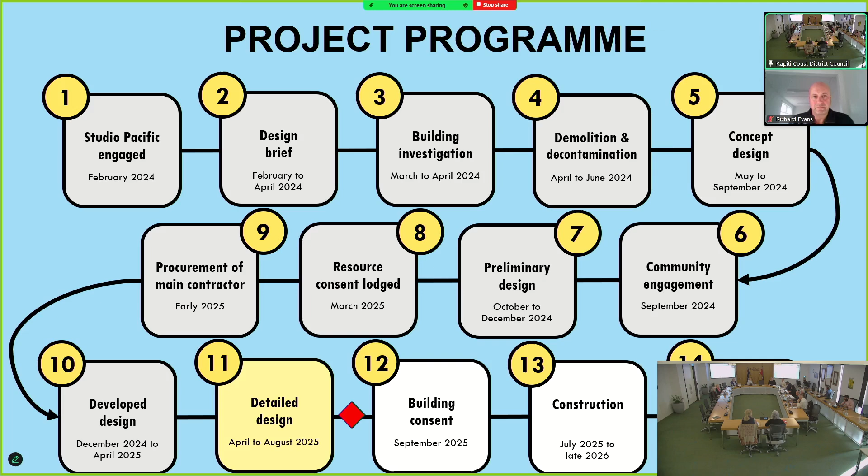For the next slide, Studio Pacific have done another updated fly-through that we can play, and as we play it I'll give a bit of commentary, and we can take questions at the end if that's all right.

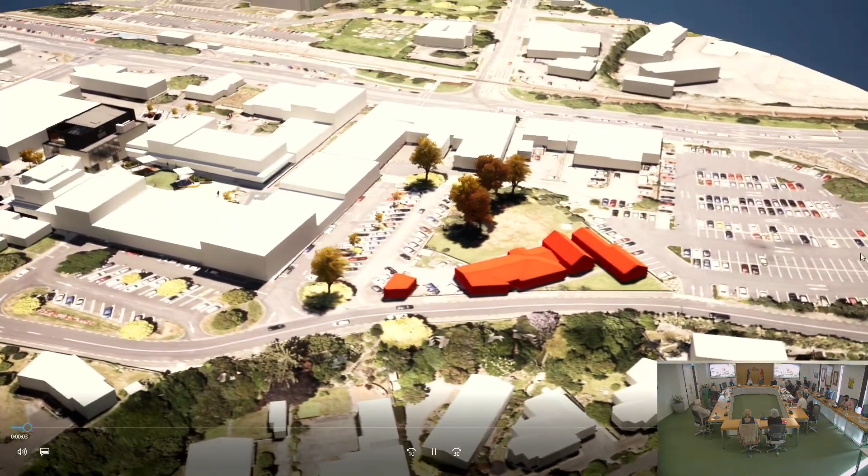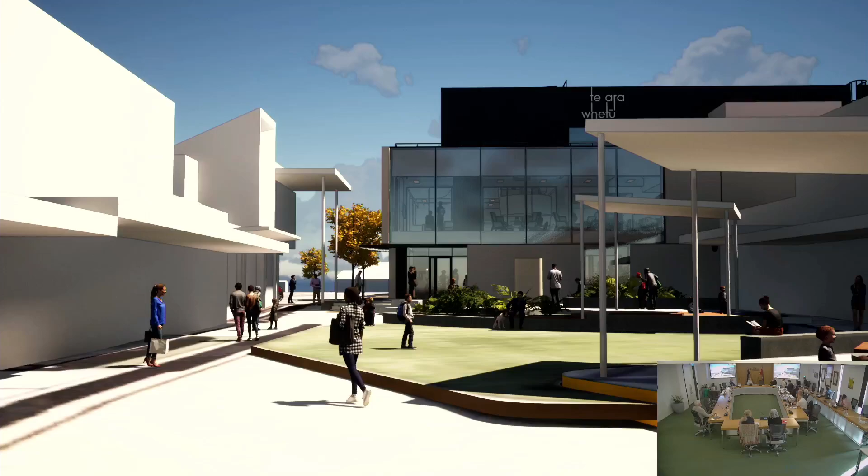This gives everybody an indication of where we are. I think by now people know where Te Ara Whetū is going. So we're coming down through here into Mahara Place and looking up where we've got the large windows above on the first floor - that's the community lounge looking down into Mahara Place.

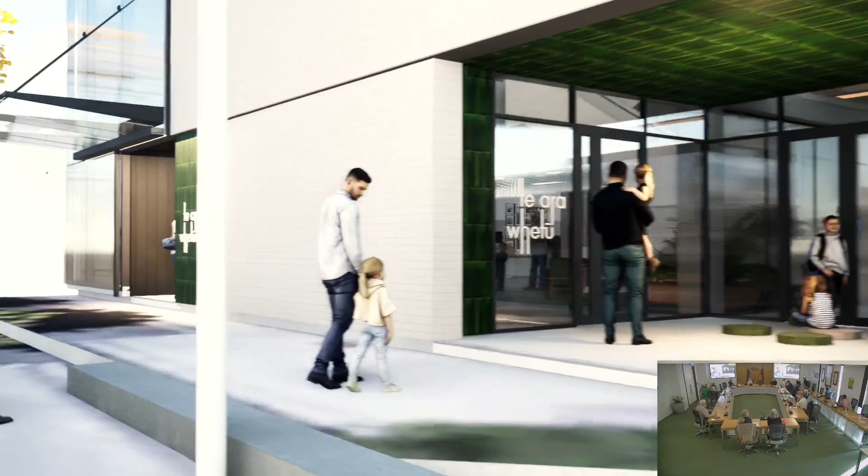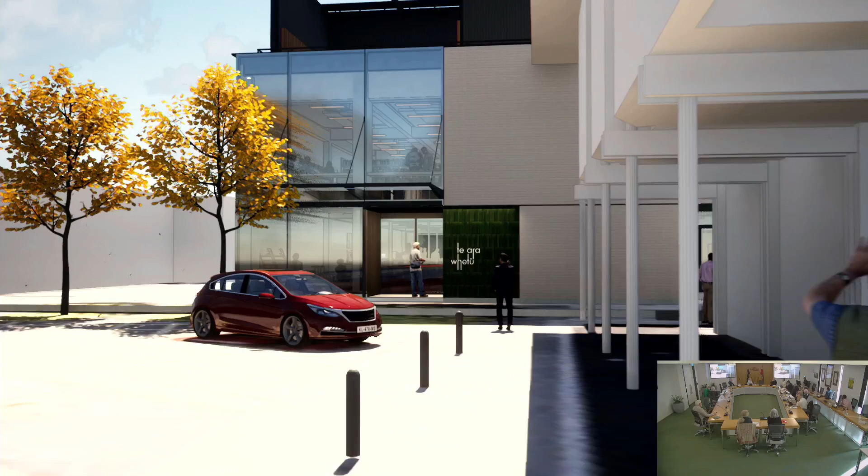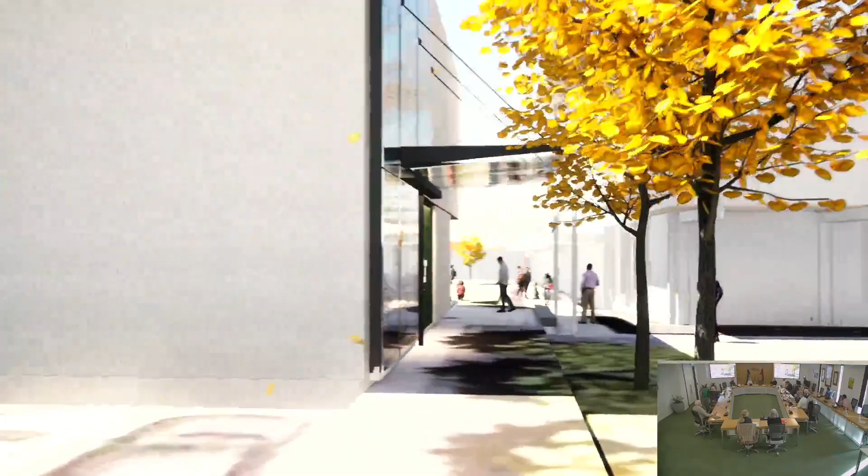Now we're coming towards the new entrance with a green tile entry. The signage isn't confirmed at the moment, so that's just a placeholder for now. The brick is an indication of the colour we're going for on the outside, and there's a bit of work in terms of patterns that might come onto that brick - still a little work in progress.

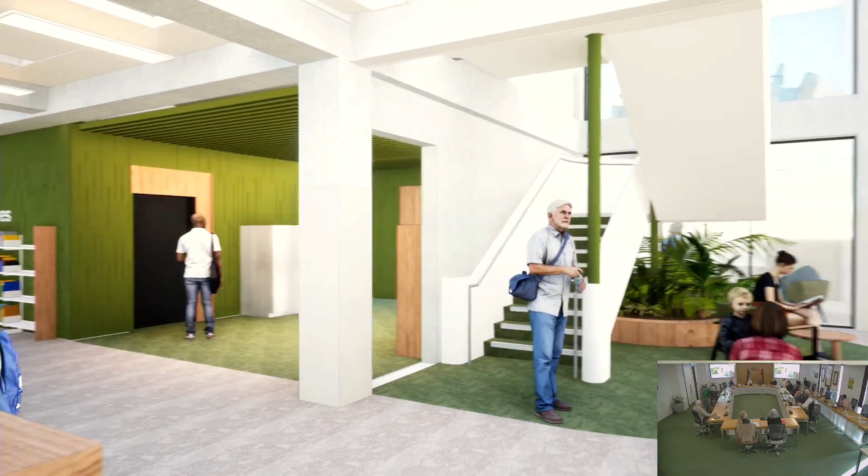Now we're coming into the ground floor where we've got the collections, an open space here where the library team can activate it in multiple ways - quite an exciting area that they're looking forward to using.

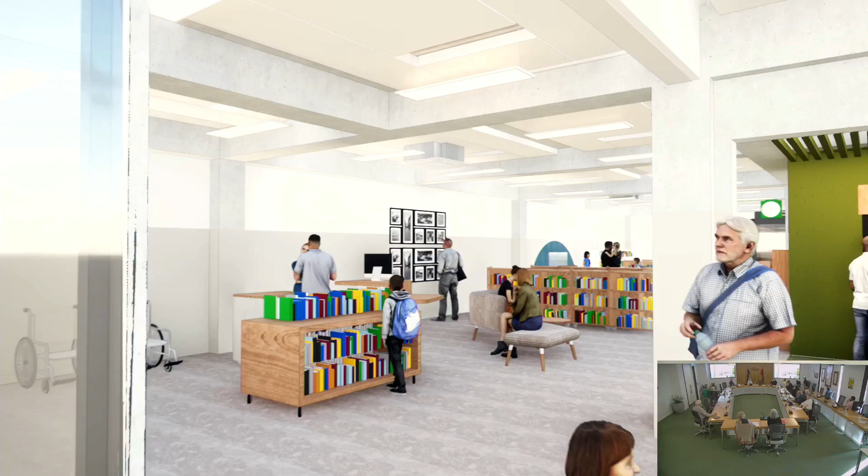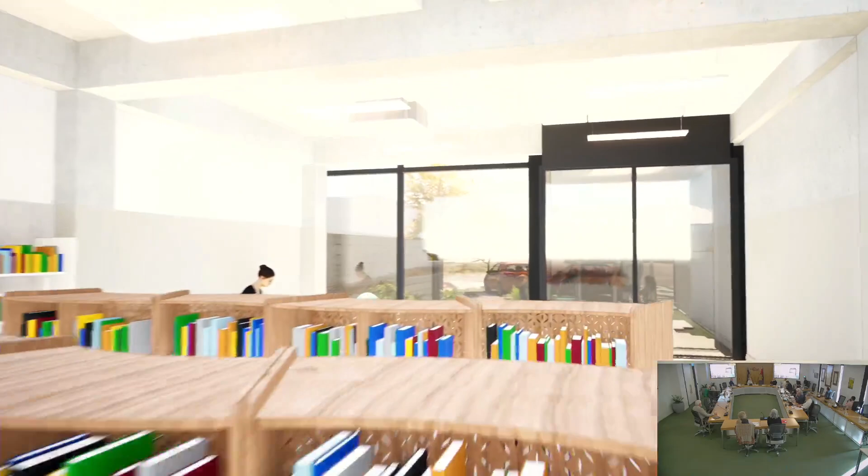Coming back down into where we'll have library staff predominantly in this area, and then down into the children's collection area. This space is where library staff are looking to change the children's area around, having a stage that they can put up and take down as they please, often used for storytelling and the like.

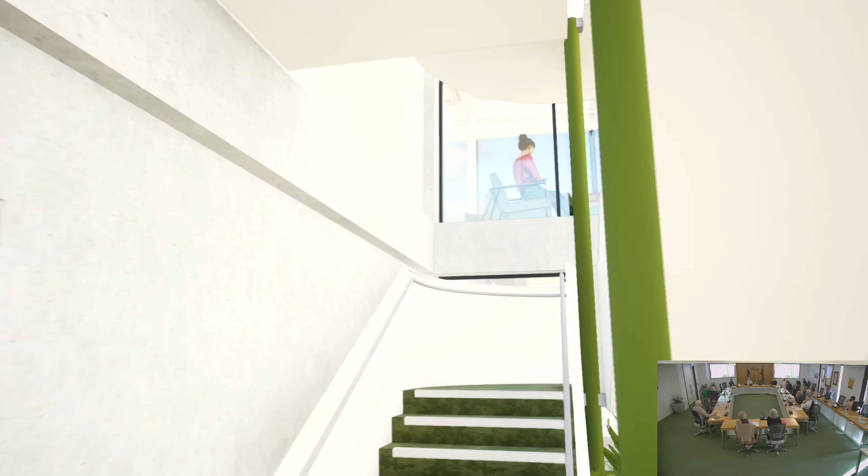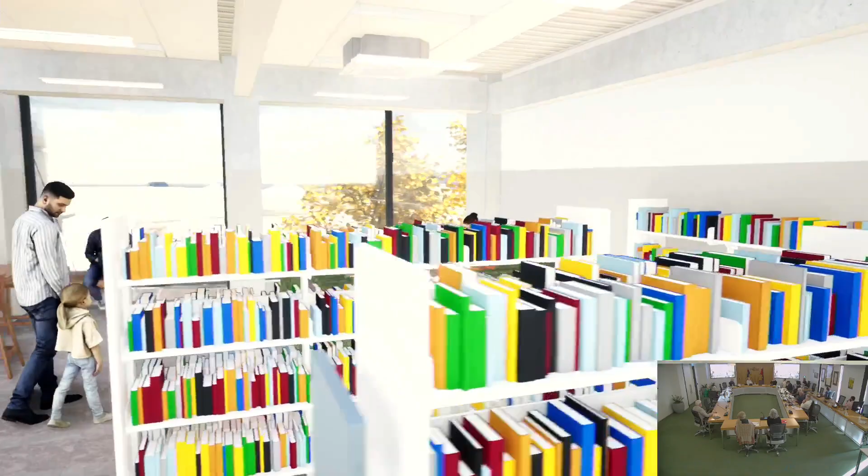The green clock - I'm not sure if anybody noticed that. That's a clock that has been refurbished; it used to be in Mahara Place, and there used to be a clock committee, so we've managed to find a home for it. The green goes really well with the rest of the interior fit out and colour scheme that Studio Pacific are going with. It's quite exciting to see that it's got a home.

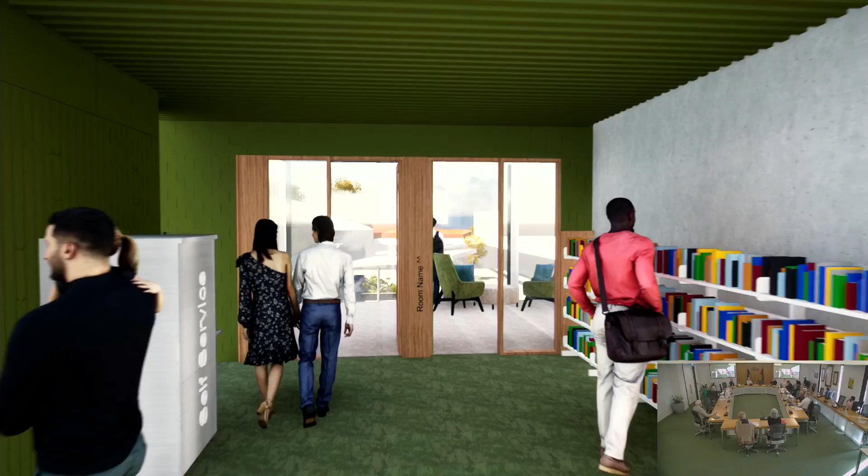Up here on level 1, there's again a Te Ara, the pathway that goes through from east to west. This is a heavy collection area, however all the shelving we're using on this floor, the majority of it, we've managed to recycle from the Paraparaumu Library, where they got rid of a whole lot of shelving, and managed to cut it down to a size that the library team are really excited to use.

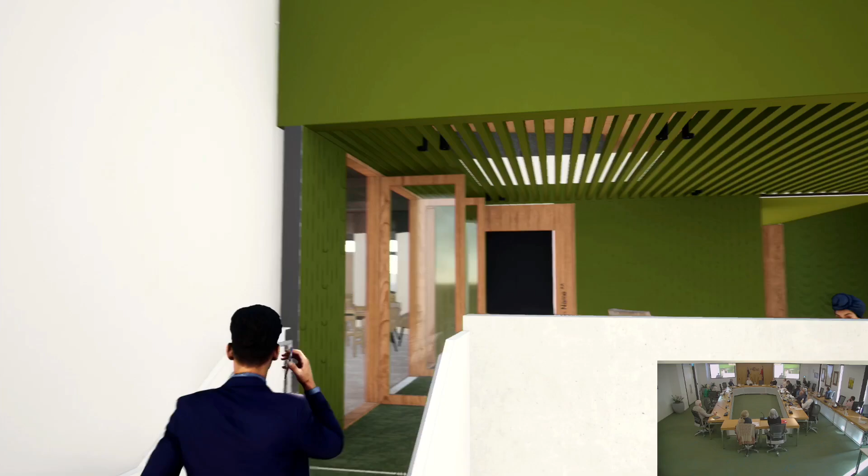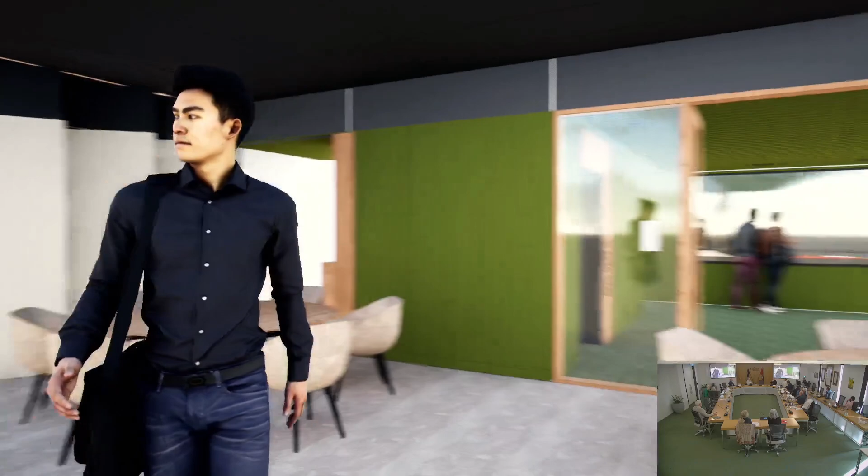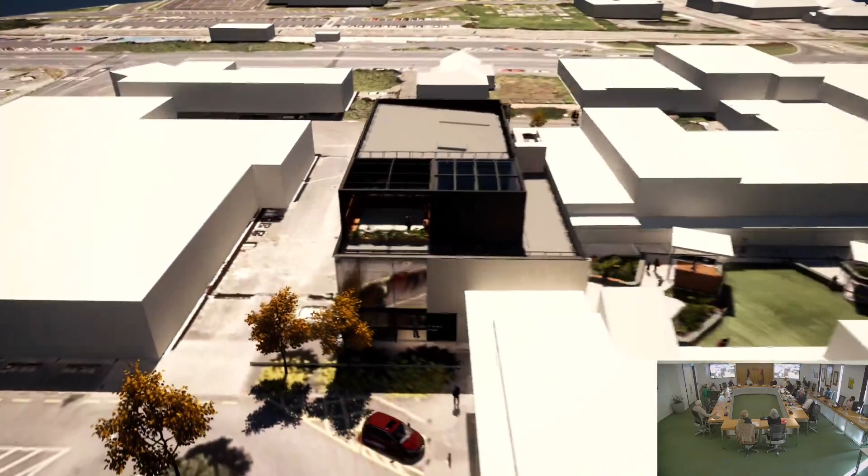Now we're coming up to the top floor, which has less or no collections. This is the multi-use space - you can see there's a dividing wall that can be opened and shut, so you can use the space as two rooms or one, and this comes out onto the outside balcony. That felt very quick actually, trying to talk through it.

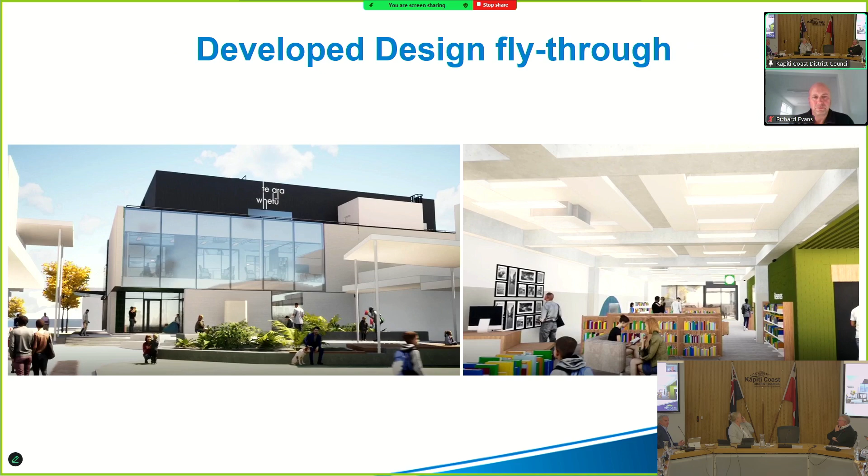At the end of the presentation I've got some floor layouts I can run through, and we can take any specific questions then if that's okay. So we'll go through the floor layouts first, get through the rest of the presentation - that might preempt some of the questions. Right, yep, sounds good. So, the next slide.

So the design collaboration - continuing to work with Studio Pacific and the other sub-consultants. We've also been holding workshops with the wider council teams, the likes of the libraries team, property, customer communities, and IT as well, just making sure that we sense check the design and that the outcome's going to be practical and work.

Naylor Love have also provided some early input in key trades to ensure their accuracy around these estimates. Some of those key trades are like the facade, and some structure as well - structural engineers coming in who are going to fit out the new steel beams and the likes. And then mechanical trade is another area that we've reached out and tried to get some input in nice and early before we go to market for fixed pricing.

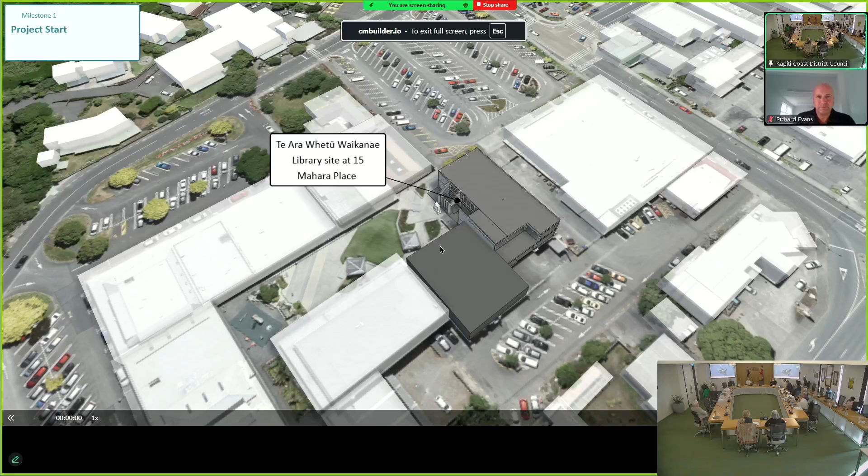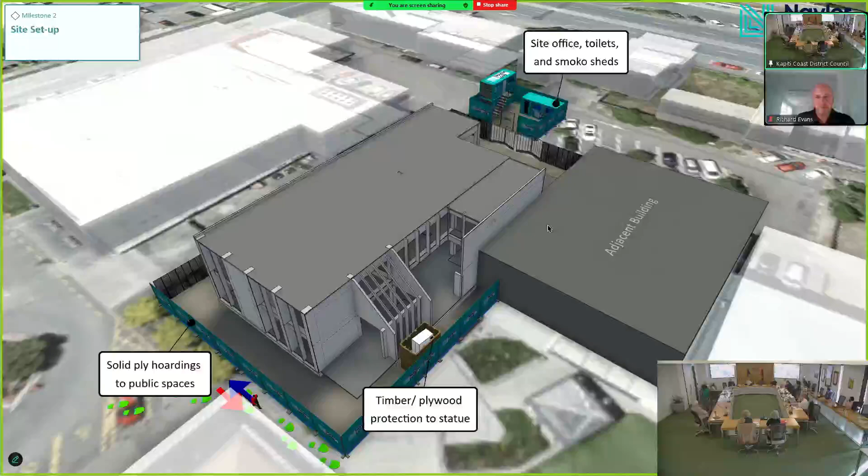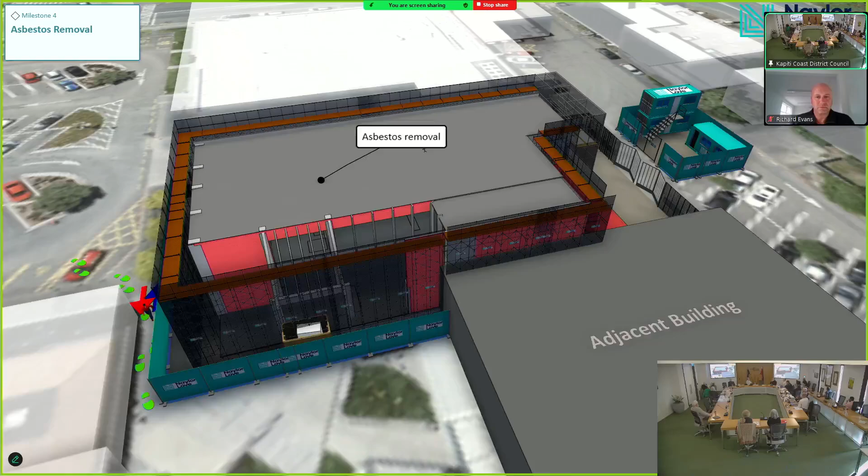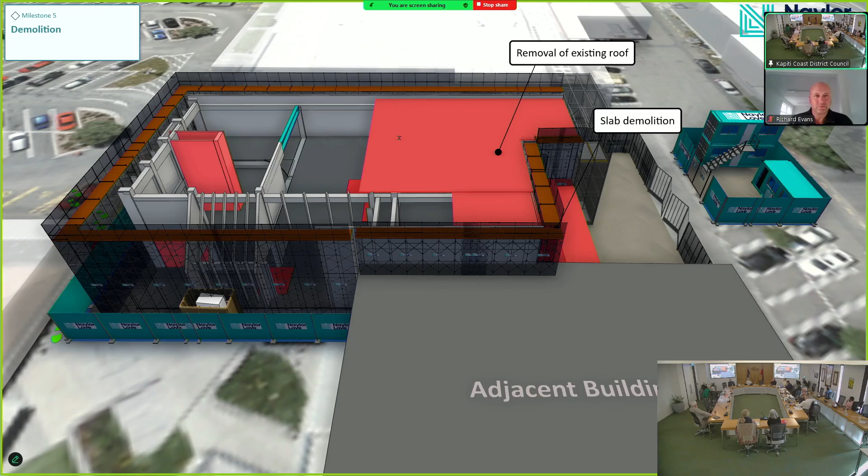So BIM is a building information model - in essence, building the new project in a computer model before we even start on site. This is really a great tool in terms of being able to have a look at construction methodology, but then when you start to get the subcontractors these days, especially the service subcontractors, incorporating it into their model into the construction model, you start to find clashes. That's where traditionally you'll get delays and variations. So being able to have a main contractor that can manage this is really important for the project for mitigating risk.

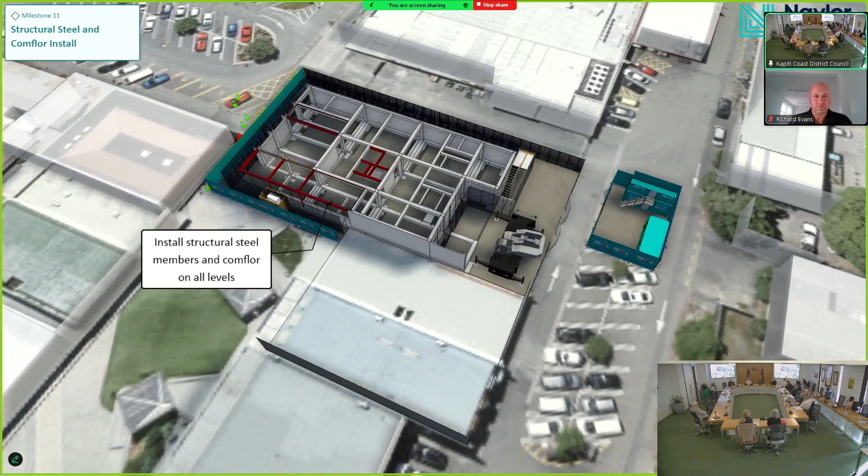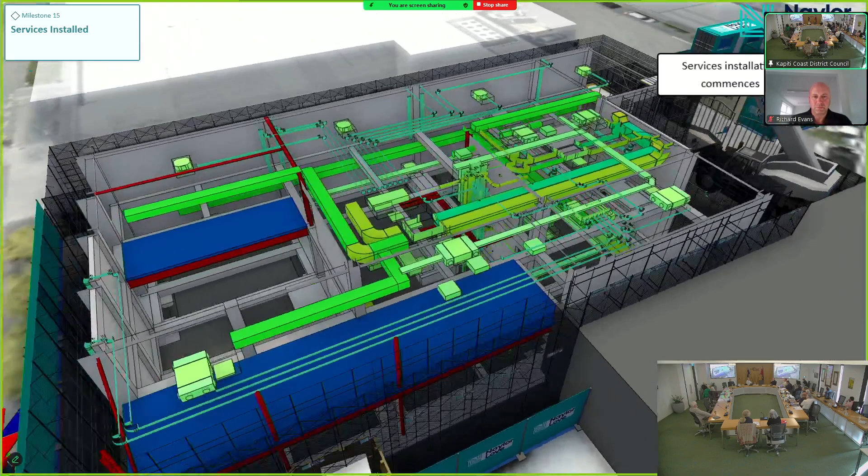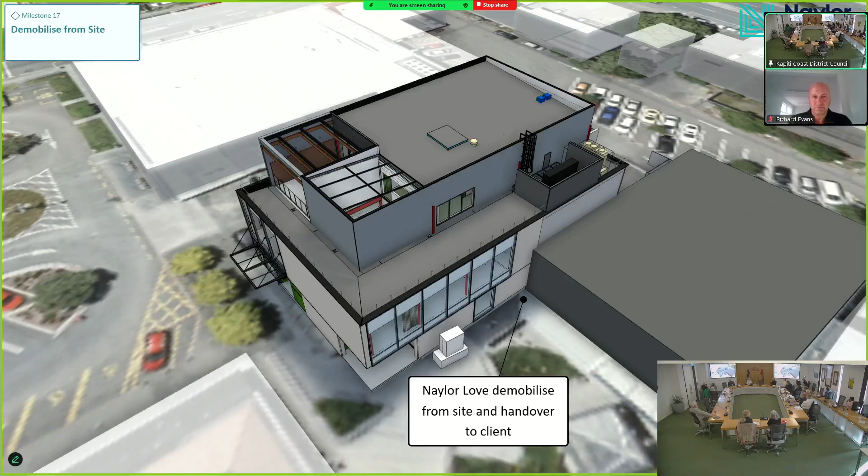So this here is them doing the ground beams that we need for the seismic upgrade. Let's jump forward - here in orange or red is the new steel beams going in. In blue, I'm pretty sure that's the new concrete floors going in. And then there's the lightweight structure going on the top floor. So again, that's really where the money in BIM is - where you see the services starting to go in, and that's where you're understanding and seeing the clashes. It's not so much just about having the nice video play through, it's really trying to see the detail nice and early before you've got anybody on site.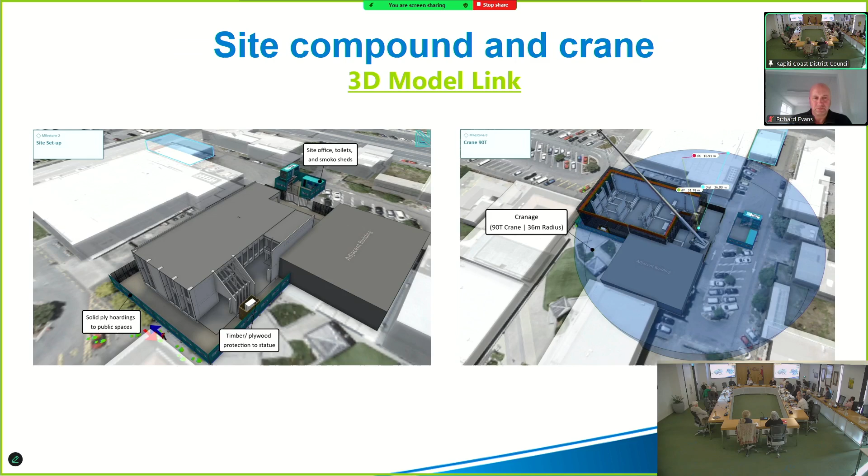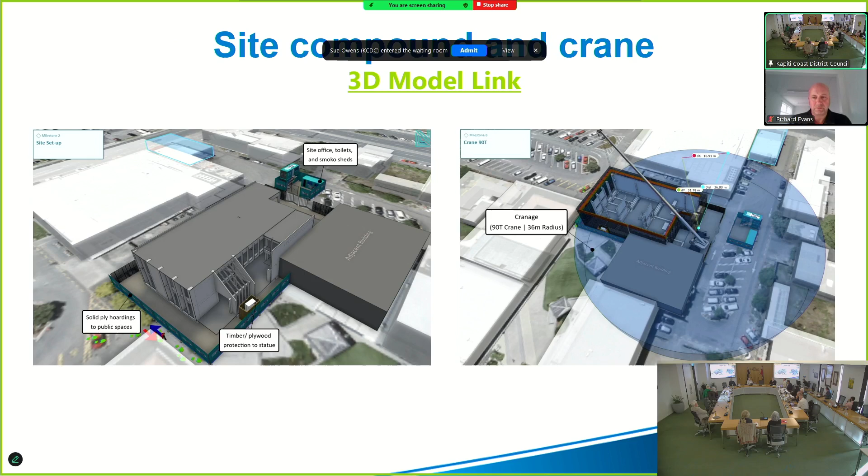This is the option I'm proposing and see as the best way forward. It takes pressure off the design team and means we can really make sure we get a good detailed design, taking into account any clashes found in the BIM model. It also lets us get onto the structure earlier through the split consent. Naylor Love have done a great job providing feedback and understand what's important to us for this project.

Just take a quick drink if that's all right.

In terms of communications and engagement, this is something we've been really proud of as part of this project. Philip has been doing an awesome job leading this area for us.

On the 7th of May we held an afternoon session for local subcontractors to meet Naylor Love. Some already knew them, but it was a chance to talk through the project, and we had a really good turnout, with approximately 30 different groups attending. It was also a good chance for subcontractors who hadn't worked with a tier 1 company before to ask questions, and Naylor Love's health and safety managers offered advice on getting upskilled or SiteWise accredited if needed to be part of the project.

They also talked through how to get on a list to be able to put a tender forward for a project like this. So that was a real success.

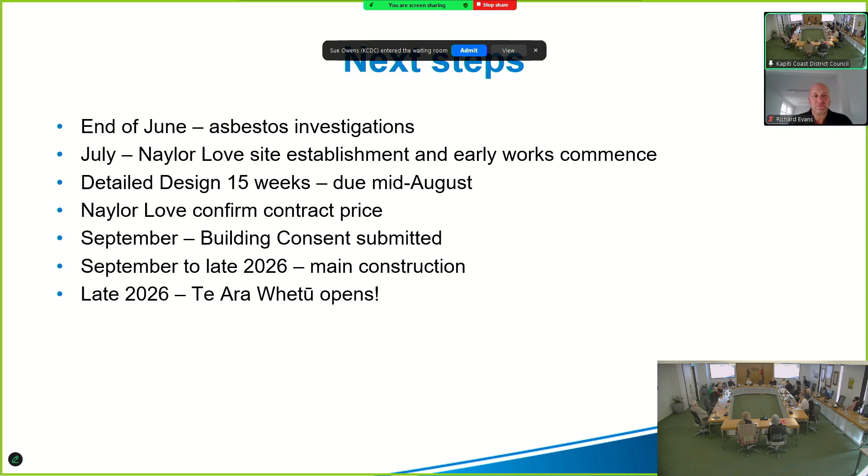Just quickly skip over here and run through the plans. I'll skip the question slide and quickly show the floor layout. So this is the ground floor, just so everybody can see.

Down here is where we've got Toi Mahara Gallery, Mahara Place here, and then up the top is the supermarket. The main entrance comes through the lobby here, through the children's area, and pop-up space.

This is an area the libraries team proposed, an area of library books that would continue to change all the time - it would never be a set category. Then down the back here is a reading area, and a small space out the back that will be fenced off, maybe as a breakout space where parents can take kids if they like.

Down the bottom corner, this area is all back of house. This is where the returns and processing happens, the staff sort of corner, and where the returns van will come, drop off books and pick up books.

Down here is a flexible space that's going to have a wet floor - it's really designed to be a messy area they can use for different sorts of workshops and classes. And this area here is where we've got a cantilevered soffit above.

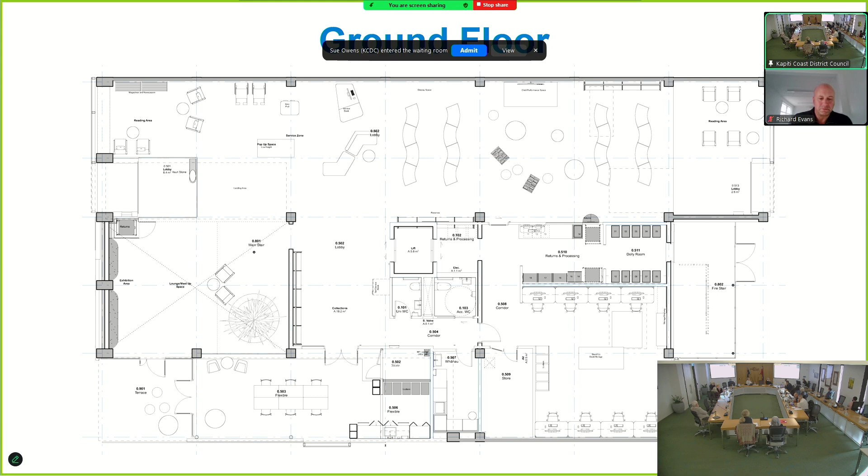Up onto level 1, we've got large print located up here, another small area where you can sit down, and then a bench seating type area here that looks down into the void below, so you can sort of people watch here.

Again, fiction and more collections and non-fiction down here, and then down the end we've got a larger meeting room that will be set up like a boardroom type area, rentable and bookable by anybody.

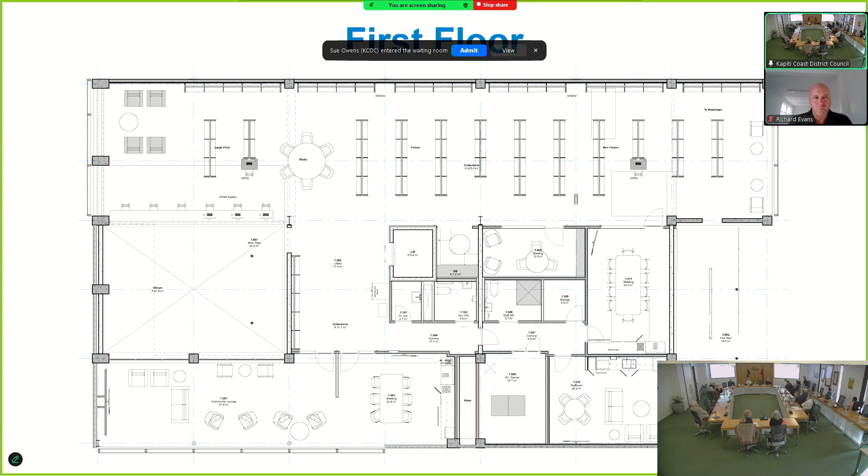A smaller meeting room is more set up for one-on-one type interviews, or maybe a school group coming in to work on a project together. And then a small booth here.

Down in this bottom corner, this is where we have the large community lounge area that can be shut off with a curtain or a lead weight curtain there.

And down here in the bottom corner is the staff room with a small kitchenette and staff toilets here. And this is the server room and storage area, toilets, and cleaner's cupboard.

And then the top floor - as we come up the stairwell here, when you look straight up, we've got a large skylight that looks all the way through. So as you come up the stairs and look up, you can see all the way through to the sky, which is going to be a very cool, great feature.

Into a large lobby, waiting type area - might be quite a nice, quiet area up the top there. If you just want to come up and break away with a book or magazine, it's a nice area.

Around the back here, so you've got an accessible toilet here, and then just a unisex toilet as well.

Over here, so the kitchenette has moved. I think last time I came in and presented to everybody, the kitchenette was on this side here. That's sort of been juggled around. Kitchenette's moved to this side, and that's freed up a larger breakout booth area within the flexible space up the top.

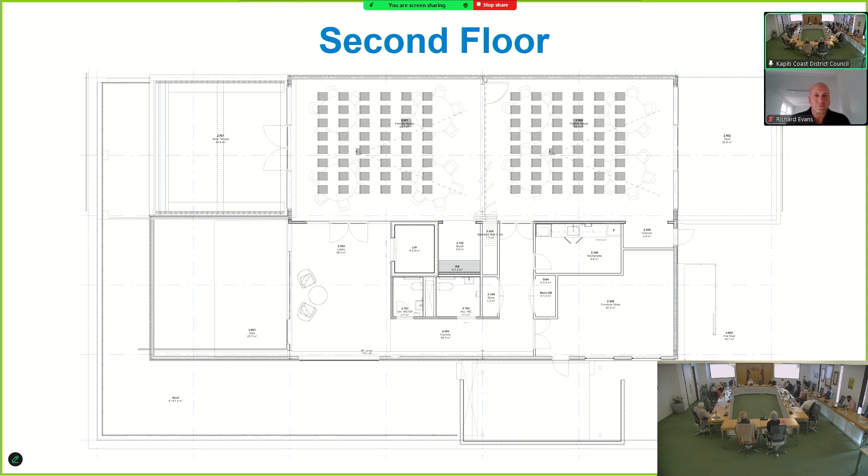The last bit for me is: are there any soundproof study rooms? When they built this building over here it won an award for the outside of the building, but I don't think anyone had a look inside, because there's nowhere that there are quiet study rooms.

Yeah, so this room here in particular, they're putting some emphasis on that room. The likes of podcasting is quite popular at the moment, and we could see that youth or even anybody might want to do a podcast in there. So that's an area where they're putting more emphasis.

Since we built the library here, they have invented noise cancelling headphones. Yeah, but if you want to talk to each other, that's a joke. I know what you mean. Yeah, but anyway, great.

Good, very good. Lawrence, this is probably a really technical question - what's the fire capacity rating for the building in terms of number of people allowed in it? I'll come back to you with the exact number on that. It is a sprinklered building.

Right, so that makes it a lot easier. It's just one fire cell, so it's not so much getting caught up in how many people can be in each room, each space - it's a total for the whole building. Okay, cool, so that makes it a lot easier.

I mean, if you're going to have an event upstairs that's 80 people or something, and your building's capacity is only 150 or whatever, that sort of limits things. But quite also, having the two fire stairwell exit stairs either end - having the external stairwell - has been a big game changer as well, so it's not a risk.

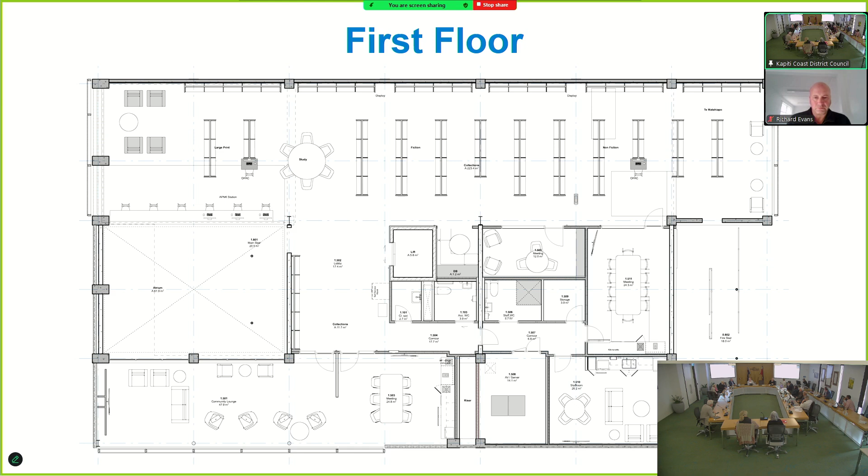Just wondering about the outside covering of the walkway space from the supermarket through to Mahara - is it covered? There seemed to be a small glass one above, from the main door to here, that's correct isn't it? I'm trying to think off the top of my head - is it from the corner there to the entranceway? But it's not here because that's where we've got the brick. It's an improvement on what's there now.

I could show the fly-through again if you like - covered now? Does anybody want to have another look at the fly-through? I know Nigel wasn't here the first time. So what we can probably do is wrap up the briefing and then those who want to have a look can look at it again.

Can I just ask a quick question - maybe if we just pause it on the outside. The fly-through should be on LG Hub.

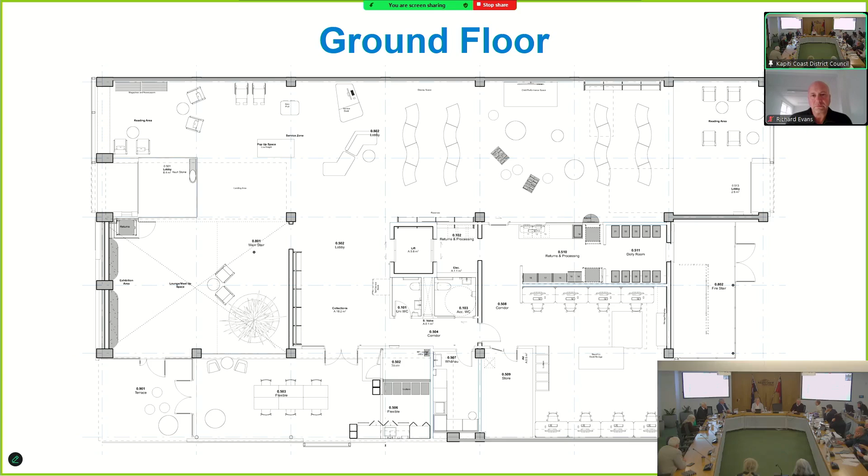When we were discussing the design early on, I voted in favour of the Guggenheim and Richard voted in favour of the box, and it looks like Richard's won. But the external colouring - what it's actually going to look like, since this was just presented as a grey box - at what stage will they have some external renderings? Yes, shortly, once we've got the design and texture approved we can forward those through. The look and colouring is like what's in the fly-through, just the pattern in the bricks - there is some detail in the fly-through.

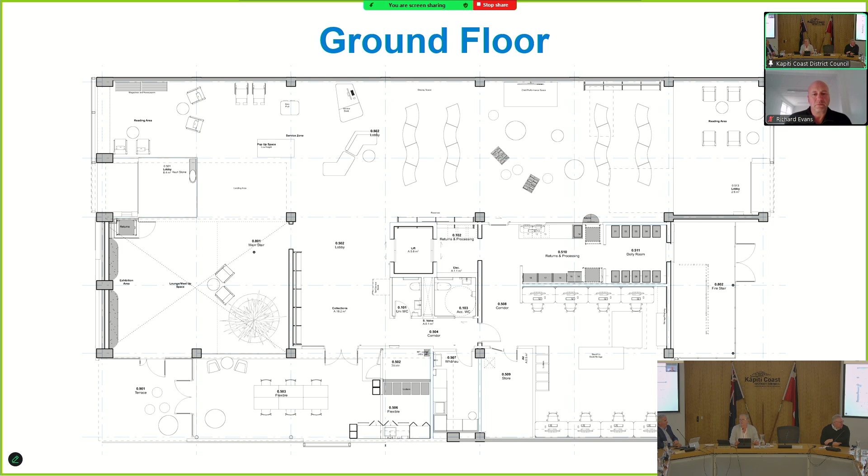It sort of is covered, because there's an awning. There's also quite an artistic exterior on Toi Mahara right next door, so you'd want to make sure that didn't interfere with that.

Okay, just have another wee look at this. Between the two of them, it's good covered. There's a bit...

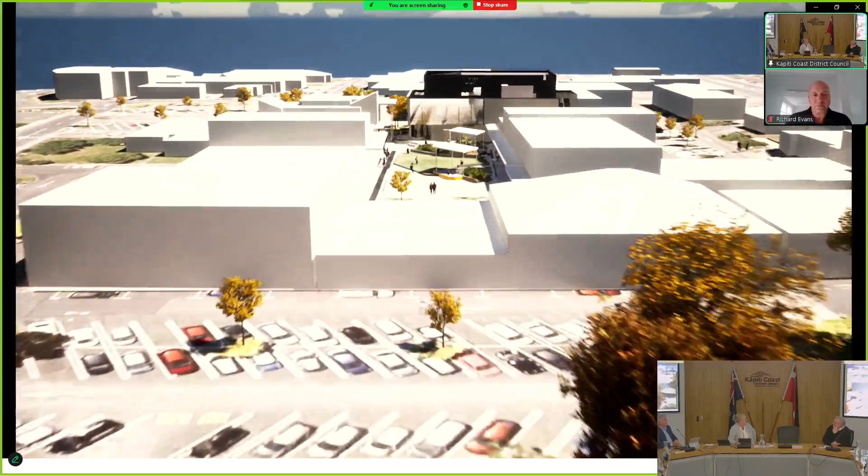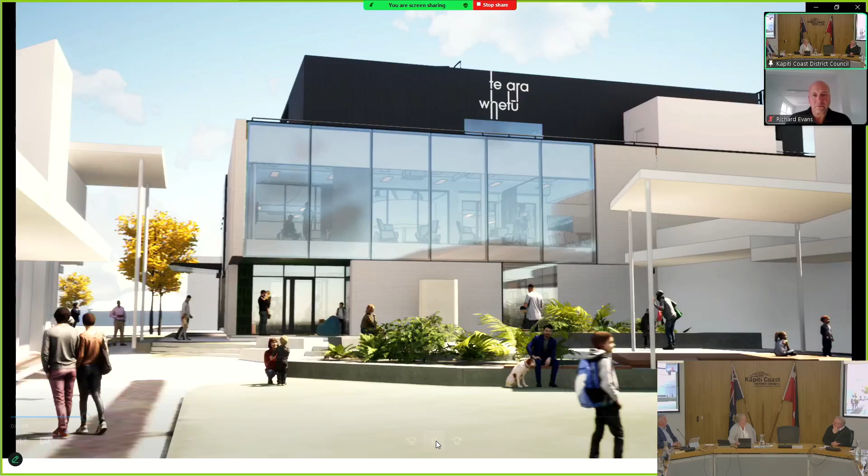That's the existing, there's nothing on the library side, not on the south side. It would just go forward a little bit more, please, Evan. And just, yeah, so you can see where we've got the brick, that there's none.

There's nothing coming out, but the awning coming out overlaps with the one coming out from the two buildings, so you can actually walk between the two. Oh, yeah, so Toi Mahara? No, that's further down.

Yeah, that's further down. There's a ramp up there. There's a ramp there as well, underneath Toi Mahara, that veranda. Yeah, and does that veranda just go straight into Mahara or?

The Toi Mahara one, I guess, just curious, is that there, does it line up with this? No, no, it's set back.

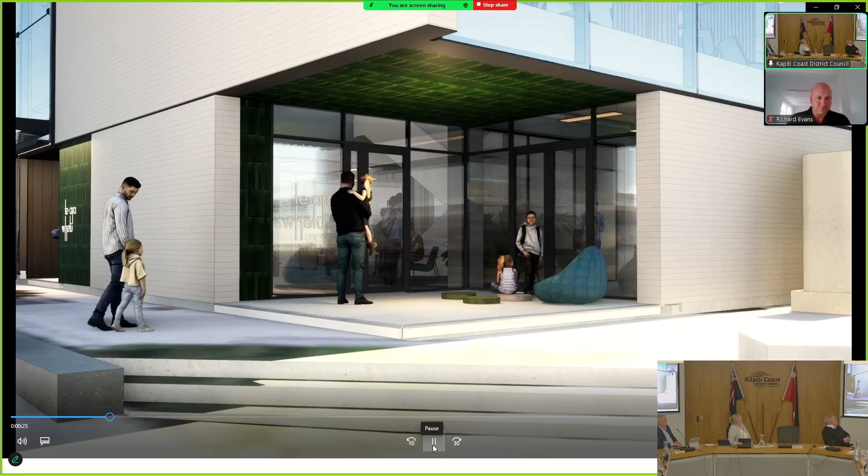Can you roll it forward a bit to the other angle? You can fly into the... keep going. That's where the current entrance is, on that corner. It's up that way around, I think.

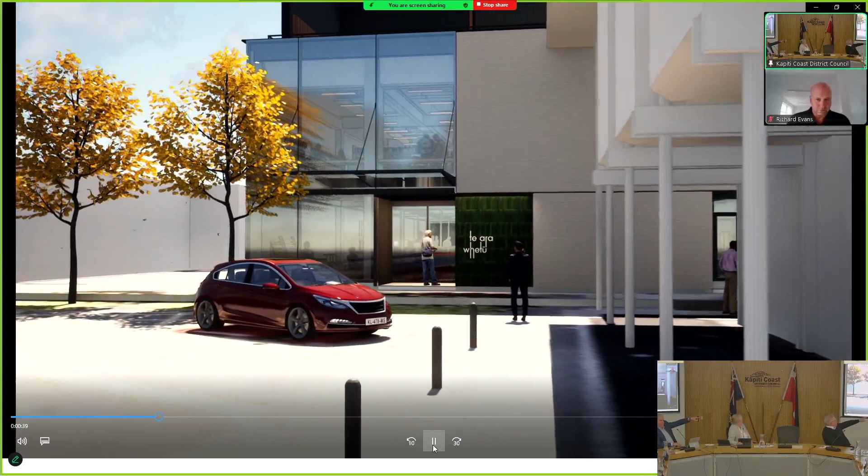Yeah, there you go. You can see looking down. That's the step Rob was talking about. You can see looking down, it steps back about 2 metres.

There isn't a cover there now. You get out, you go Toi Mahara side, you can get round to the butchers without getting wet.

So that's the only entrance. There's no entrance onto Mahara Place. There's some doors there, but it's not an entrance as such. That's the main entrance, yeah.

Okay, actually, just by the way, in Mahara. Hang on, turn on your microphone.

In Mahara Place, if you start at Mahara and you walk down past the shops, past the chemists, etc., and you go around and you don't have an umbrella, you will get wet. There are about 6 different places where it leaks like a waterfall inside that overhangs, just as a matter of interest, which has been raised several times. Apparently it's private property, but nobody's making the owner do anything about it. So I'm just saying that your covered walkway doesn't necessarily guarantee you'll stay dry in Mahara.

That's true anywhere. Okay, I'm going to wrap up there. I've got one more point from Rob, and we'll get that comment, and then we'll wrap up. On that, any chance of having a colonnade along there, that aspect, with a veranda and a bit more inside-outside, just to break up the blandness of it? Please just wait till we get the final design, because I don't think it will be bland at all.